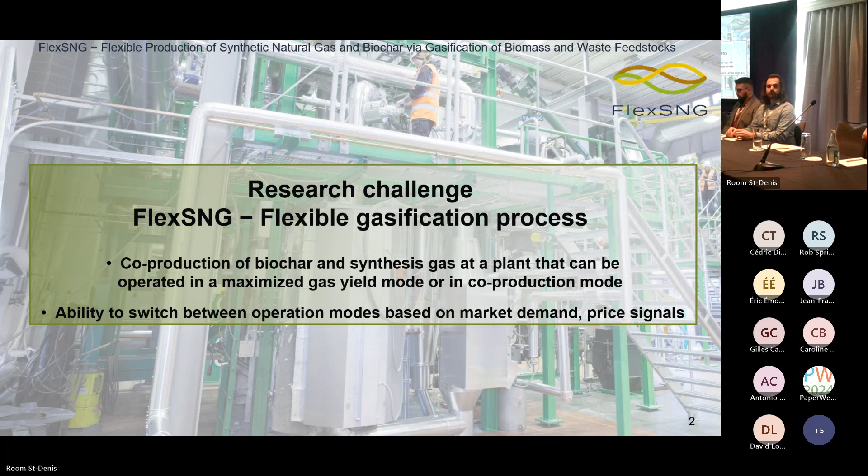Good morning, everyone. I will talk about VTT's research challenge, and our focus here is the flexible gasification process, where we co-produce biochar and synthesis gas in a plant that can be operated in two modes: a maximized gas yield mode and a co-production mode. The plant also has the ability to switch between these operation modes based on market demands and price signals. First, some background for this flexible gasification process. VTT has a very wide gasification-based synfuels process development, and we have key steps here.

Gasification in CFB gasifier, which is pressurized steam oxygen, followed by filtration, hot filtration, and catalytic reforming. The final gas can be utilized in, for example, FT products, methanol, SNG, and hydrogen. So several applications.

We have developed and demonstrated this together with Sumitomo SFW, this process, and also have wide experience with different kinds of fluidized bed gasifiers like CFB, BFB, and modified BCFB, which I will come later to tell you what that is. Okay, that was the background.

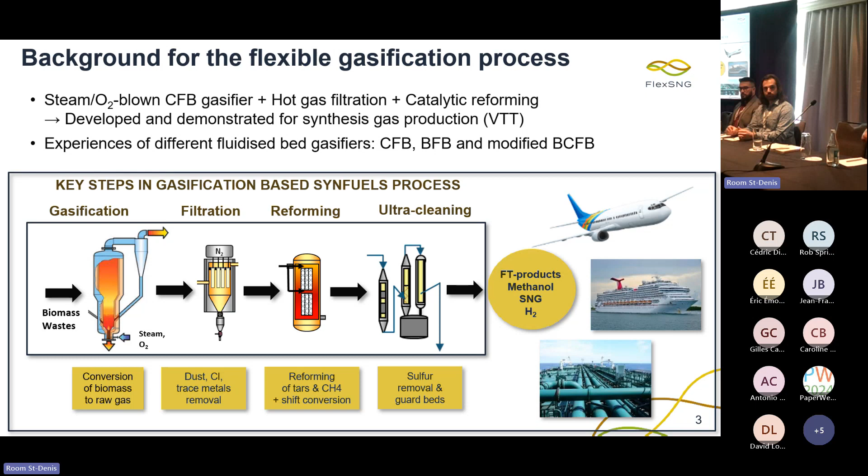Then we enter our fluidized bed gasification technologies. In this FlexSNG project, we had two alternative gasifier designs, which we examined in the co-production of biochar and syngas.

First, when this FlexSNG process was planned, our initial assumption was that the ordinary CFB gasifier process would not be suitable for this biochar production.

In this CFB, the feedstock is fed above the dense bed. Here's the bed, and then it's pyrolyzed in the upper part, and we reach a high carbon conversion. The recycling charcoal meets again the oxygen at the bottom of the bed.

So there would not be produced biochar in this CFB. We also assumed that we would reach a high tar content at low temperature gasification, which would block the filter and cause soot formation in the reformer. So the biochar would be recovered in the CFB gasifier as filter dust.

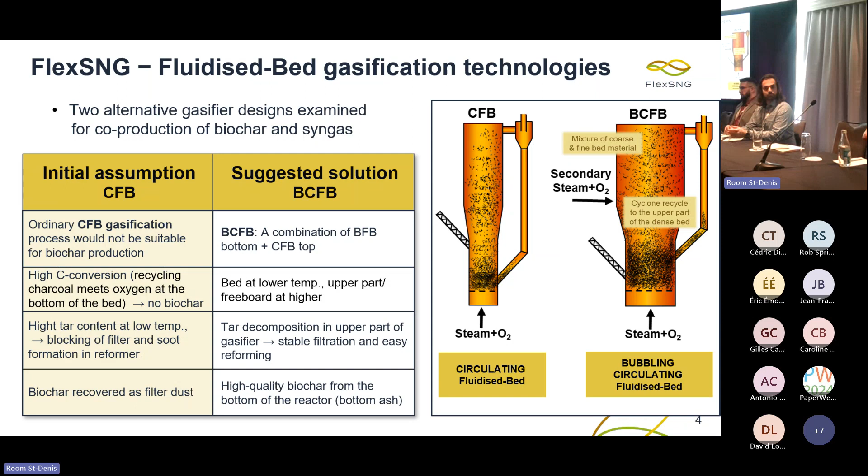Then we produced the biochar, and it was delivered for further characterization to one of our project partners, EIFER in Germany, to see how it was.

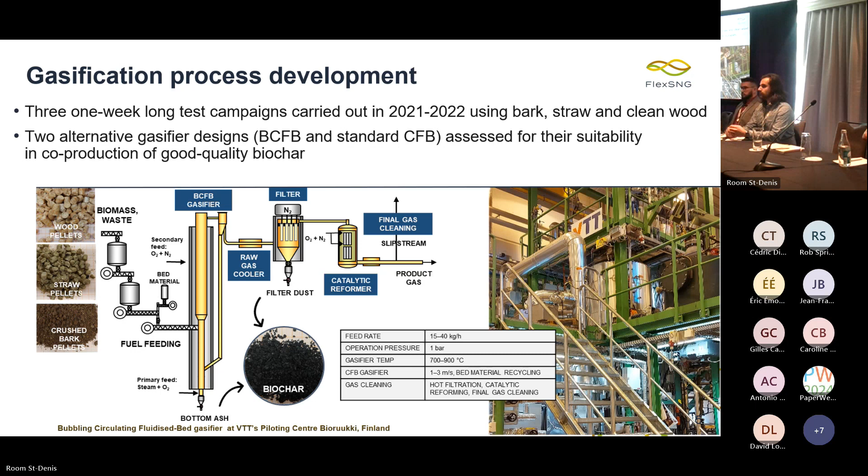First we entered the BCFB mode. We achieved very flexible operation in that case. First we used very high temperature gasification near 900, and as you can see, we reached a high carbon conversion in this case.

Then we reduced the temperature to near 700, and the carbon conversion was reduced in this case. Most of the charcoal was attrited to fine dust, and it would be captured as filter dust in this case.

But then the last set point was done at a lower temperature near 650, and it was the case that we managed to get a biochar like this one, but it also entered the filter dust, the gray bar here. The operation was unstable in this low temperature gasification.

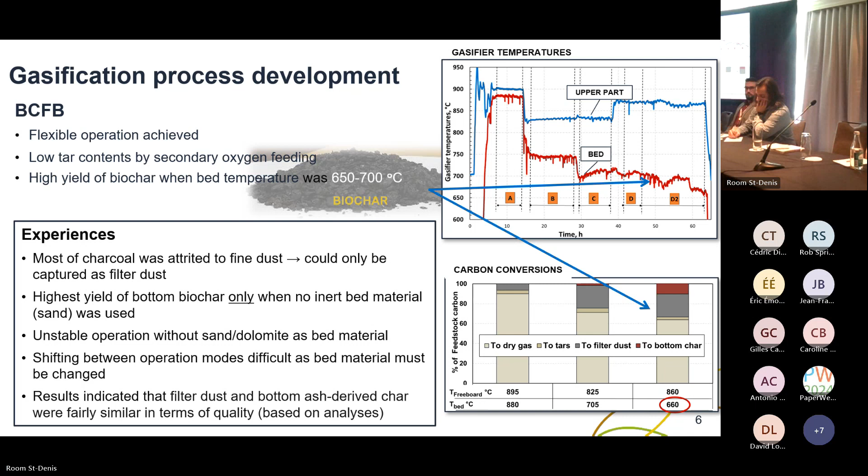Then we entered CFB mode. So we reached again flexible operation under both operation modes, as you can see.

The biochar yields were increased when the gasification temperature was reduced. In this case, the biochar was recovered as filter ash rather than from the gasifier bottom. So it was in filter ash.

But in this case, CFB mode, it was very easy to shift between operation modes, and it's a highly reliable and stable process. We carried out very successful tests with all these feedstocks.

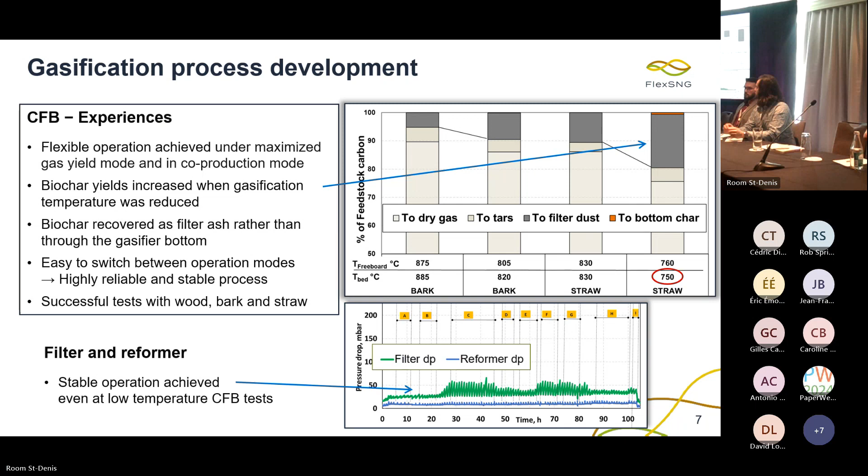Also, the filter and reformer worked well. There was stable operation achieved, and the catalyst worked well. There were Johnson Matthey catalysts, even at low temperature tests.

So the conclusion was that both gasifier modes could be adapted to FlexSNG, but if we take into account the industrial perspective and scalability of this technology, the conclusion is that the standard CFB gasifier was more capable of producing high-quality biochar. It was less complex in reactor design, and would work well. So we selected the CFB for further validation tests, which are now ongoing.

In addition, this CFB gasifier has the following benefits: it's industrially proven by the Sumitomo SFW gasifier design, and it has been demonstrated in syngas applications. Also, the operation flexibility is better in this case, and it's easy to transition between this co-production and maximized production modes.

And also the differences in biochar quality between these CFB and BCFB designs were not as significant as we expected beforehand, although we got a high yield in BCFB mode biochar also. And then the filter and reformer handled even high tar loads without signs of soot formation.

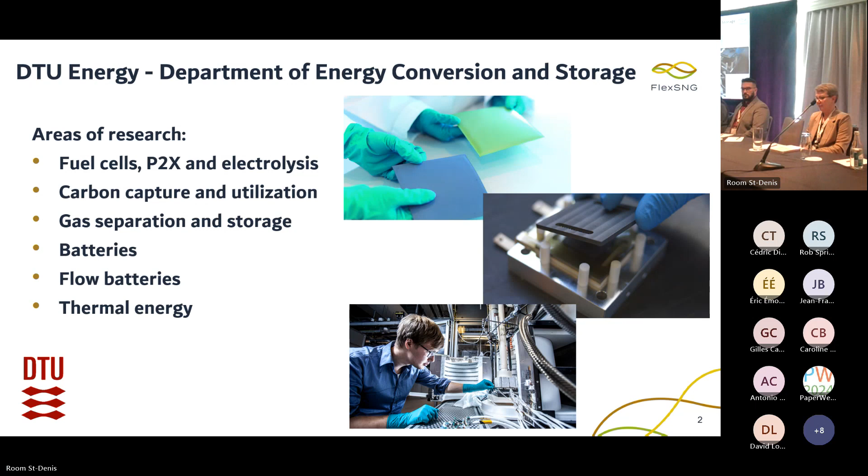And in particular, in this project, we try to apply the OTM, oxygen transport membrane technology, for oxygen production. These membranes are ceramic high temperature membranes that are capable of transporting oxygen from one side to another of the solid membrane by an electrochemical principle of operation. So we can obtain pure oxygen on the permeate side of the membrane. And the driving force is the different partial pressure of oxygen on the two sides of the membrane.

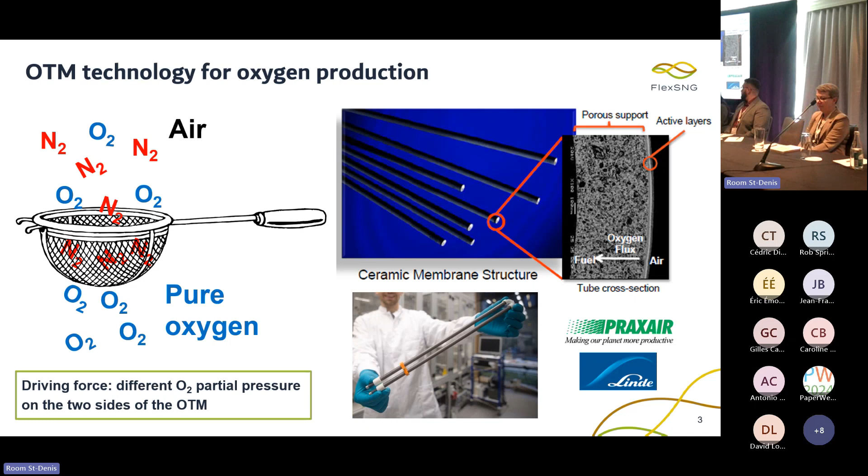And as you can see, the membranes are obtained in this hairpin, as we call it, kind of shape. And they are produced by Praxair, which is now part of the Linde Group. We started testing the membranes in our single tube performance evaluation rig, so small samples of about 5 centimeters of length.

And we characterized the operation of these tubes, flowing air on the outside of the membranes and reducing gas on the inside. And we tried both with pure hydrogen and a composition that simulates the syngas that is produced by the gasifier. And after mapping the performance of the membranes, we managed to obtain the target of the project, which is an oxygen flow of about 3 milliliters per minute per square centimeter of active area of the membrane at a temperature of 950 degrees Celsius. And we got results above the target of the project in both feeding conditions of hydrogen and the simulated syngas.

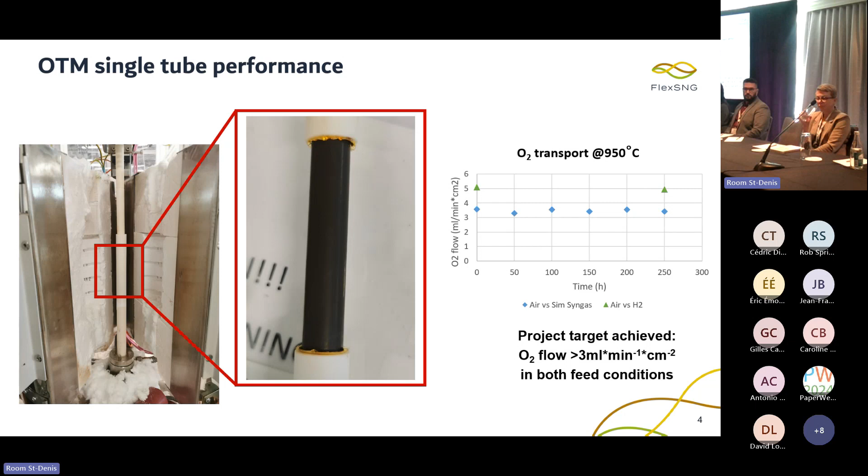After that, it was time to go bigger and implement the membranes in a full-sized reactor. So we designed the reactor in this radial configuration of the tubes that you can see in the cut view of the reactor. We produced it, and as you can see, the operating parameters are a temperature of about 900 to 1000 degrees that grows from inlet to outlet, and it generates a heat power of about 1.1 kilowatts.

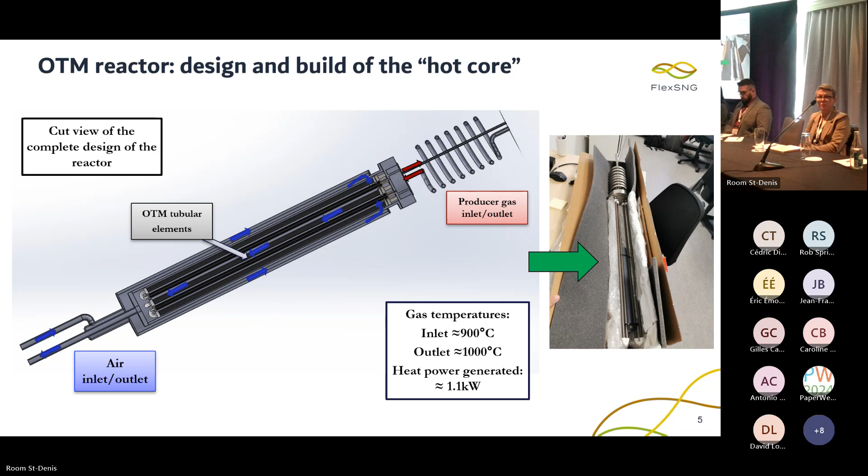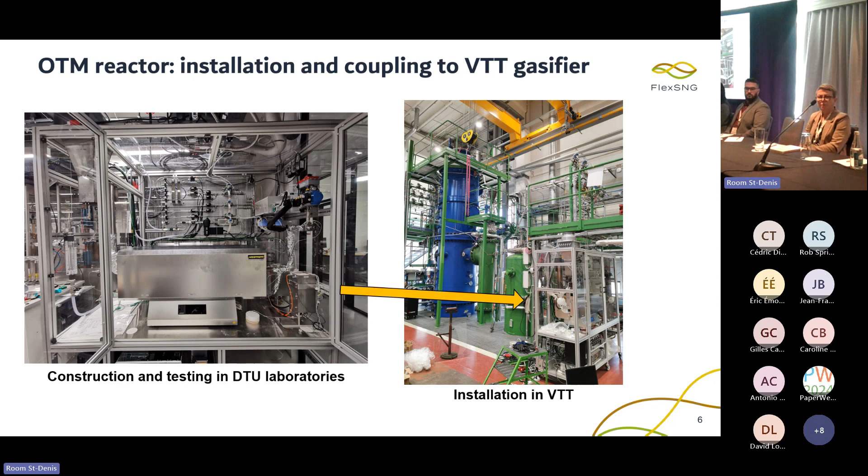The reactor was then installed in a test rig that can be operated autonomously, but can of course be interfaced with the gasifier. And then the rig was shipped to Finland and interfaced with the gasifier, so it can receive the gas directly from the gasifier during operation. And the results that we obtained were very good.

We are still testing. We are 2 test campaigns in, and we managed to obtain stable operation of these membranes for above 100 hours, and a performance in terms of oxygen transport that is within plus minus 5% of the reference levels that we measured in laboratory conditions.

A very good result that we obtained is that the membranes are highly tolerant to the impurities that are contained in the gas, so sulfur, chlorine, that we foresaw could be a problem for the membranes, but for now it seems like they are quite stable and tolerant to this level of impurities. And they managed to achieve a conversion of tar above an average of 90%.

We also checked the resistance of the membranes to cycles of oxidizing and reducing conditions, and they also managed to withstand this cycling without particular signs of degradation of performance.

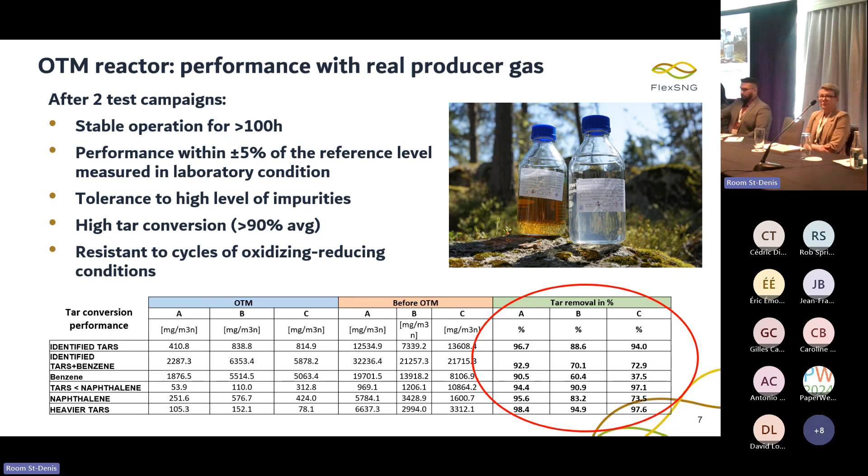So the integration was a bit challenging, but we also have future challenges. We have to test the long-term durability of the OTM. So in terms of thousands of hours, that will go above the project target, but we plan to continue testing them.

And we plan on trying to improve the conversion of aromatic molecules such as benzene and naphthalene by introducing a different catalyst or varying the residence time of the gas inside the reactor. And on top of that, we're probably also going to test pressurized operation of the reactor, because now we operate just slightly above ambient pressure.

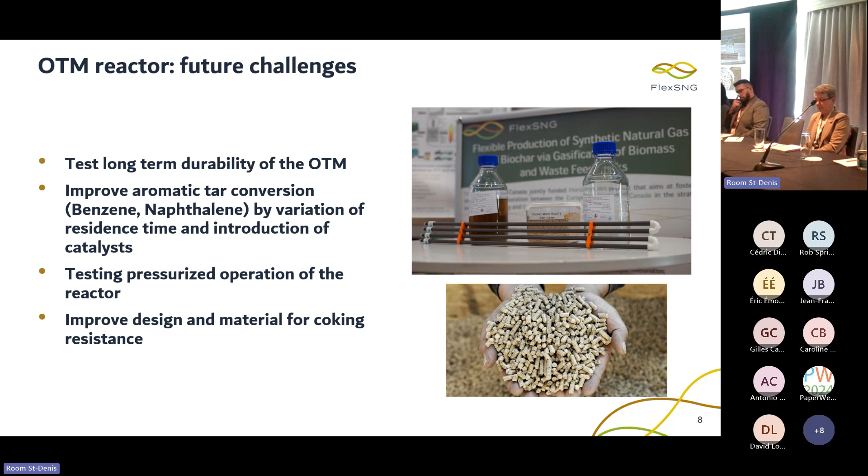And also check some alternatives for the materials utilized in this reactor design to improve the coking resistance of the various parts of the balance of plant. And that's all from me.

Okay, so my time. When I'm developing our decision support systems, I typically look at one chain at a time, so forest by itself or agricultural by itself. Now, of course, in FlexSNG, we have this idea to put everything together, which makes it more complicated. The potential for savings is higher, but it also brings some complications. So I'm briefly going to go through some of the challenges that you typically don't see when you are doing one of them.

So one of the critical ones is the seasonality. In agriculture, depending on the crop type, you might do 1, 2, or maybe 3 harvests during the year when there's a high intensity of harvesting. In forestry, it's more long term. You do a bit more harvesting in the winter, but the collection of residues more in the summer. So you have a bit of seasonality. For municipal waste it's similar. You have more demolition, more renovating of houses in the summer, so you have more supply at that time.

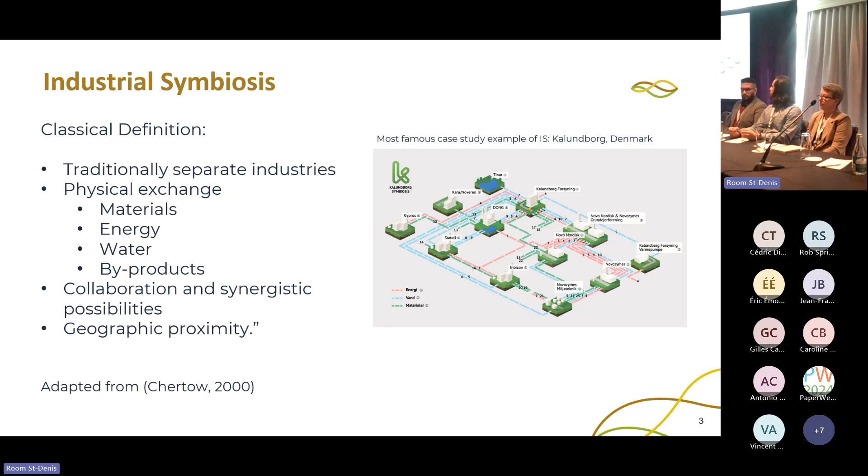So if we now take these four classical, there we go. If we apply this definition of industrial symbiosis to a biorefinery, then it can potentially facilitate the increase of profitability as well as competitiveness. And it does so by doing exactly as the definition states. It looks at the exchange of waste, energy, cost reduction, as well as the environmental impacts, and improving the opportunities for innovation as well as collaboration.

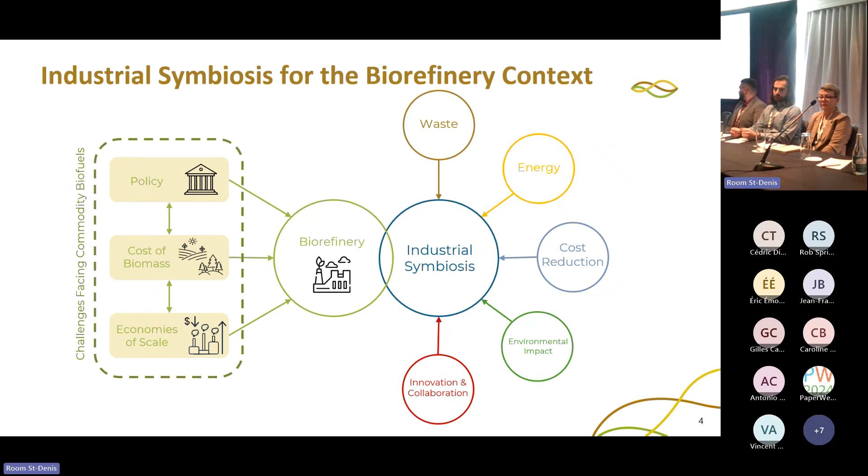So what are the challenges that we'll be facing? I think everyone this morning has highlighted the challenges that we will be facing with FlexSNG moving forward very clearly, and also highlighted the potential solutions and the collaboration that we need. One major thing is resource availability as well as supply chain challenges, where biorefineries rely heavily on a consistent supply of biomass feedstock.

The variability in availability, quality, as well as the cost of biomass can pose significant challenges. Additionally, logistic issues related to collection, storage, and transportation of biomass can impact operations and efficiencies as well as cost. So the potential solution for this is integrating biorefineries with a network of industries, where we can have access to biomass sources in a variety of sectors such as agriculture, municipal waste, as well as forestry.

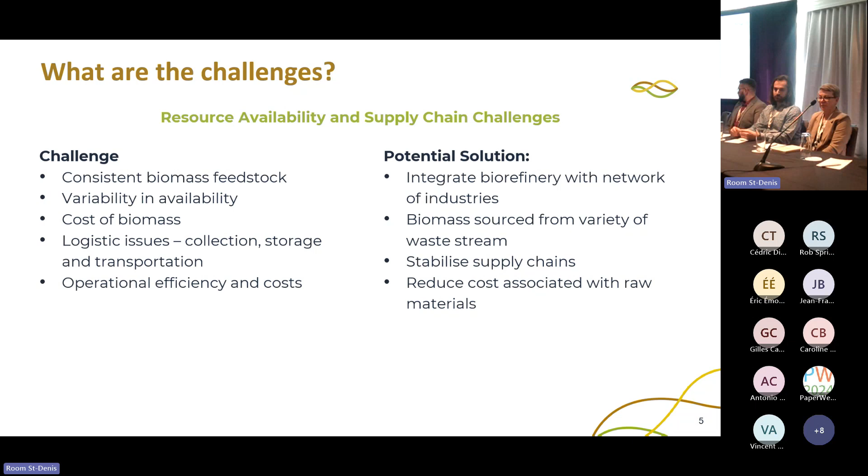This can then stabilize the supply chain and reduce costs associated with raw material. For instance, industries that produce organic waste can directly supply a nearby biorefinery, minimizing transport costs and enhancing feedstock security. Another issue that has also been highlighted is policy and regulatory barriers.

And David actually mentioned so beautifully this morning that in 2024, we're more equipped than we were 10 years ago to move into this sector, where the challenge is generally that there's uncertainty and unfavorable policies and regulatory environments that can hinder the growth of biorefineries, industries lack the incentive for sustainable practices, and there are stringent regulations that might not account for the benefits that you can get with adding

a biorefinery. So to swing this, we can say that by demonstrating the environmental and economic benefits of the integrated approach, industrial symbiosis can influence policy development, but it's also collective advocacy from industries involved in symbiosis that can lead to more supportive policies, incentives for waste reduction, energy efficiency, and development of bio-based products.

Next up is the challenges that we face with technological and operational hurdles. Developing and optimizing technology for biomass conversion is complex, costly, and requires extensive R&D to satisfy the bankability requirements of investors and financiers. Process and operational efficiency is also affected by feedstock variability, as we've heard so clearly.

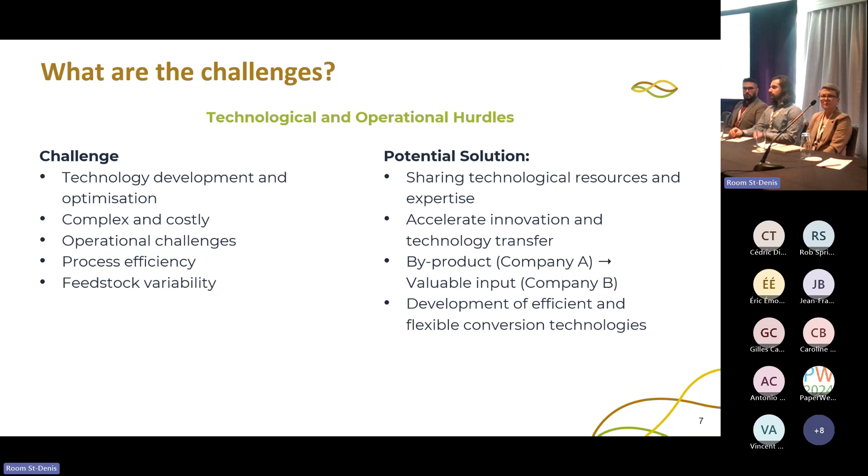So this brings us to my final point, which I'd like to highlight as well, the economic and financial risk. High initial capex investment and uncertain financial returns can deter development of biorefineries. The market for bio-based products is also evolving, and there can be significant price volatilities for both feedstock and end products.

However, yet again, as beautifully highlighted this morning, we're moving into an era where the larger industries, such as aviation and maritime, are feeling the pressure to move towards more bio-based fuel sources. So this is definitely also helping with developing that market for financiers to go, okay, we'll come to the table. So the solution for this is definitely collaboration facilitated by industrial symbiosis, and this can help spread that economic risk and provide more stable financial models.

So as said, joint ventures and partnerships all allow for the sharing of cost and the development of technology, as well as feedstock supply and product marketing. Moreover, this creates a diversified portfolio of end products that can mitigate the market risk that we can have.

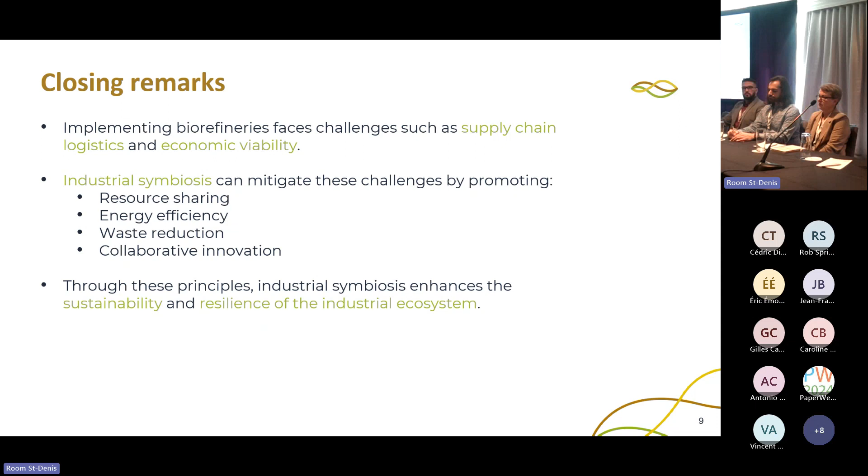So just as a closing remark, implementing biorefineries faces challenges such as supply chain, logistics, and economic viability, while using industrial symbiosis can mitigate these challenges by promoting resource sharing, energy efficiency, waste reduction, and collaborative innovation. Through these principles, industrial symbiosis enhances the sustainability and resilience of the industrial ecosystem.

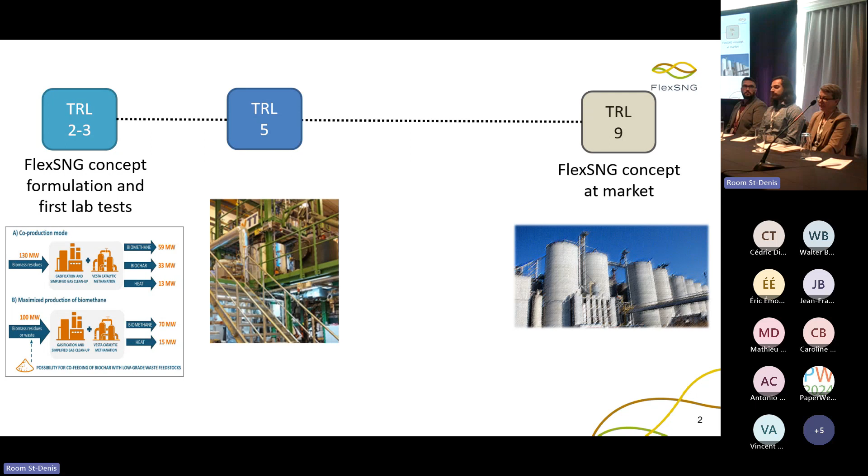Now the question we have to answer is how we're moving forward. How can these very interesting technologies, which already have a beneficial impact on the production of sustainable biomethane and biochar, be moved forward and become economically available and appealing in the near future?

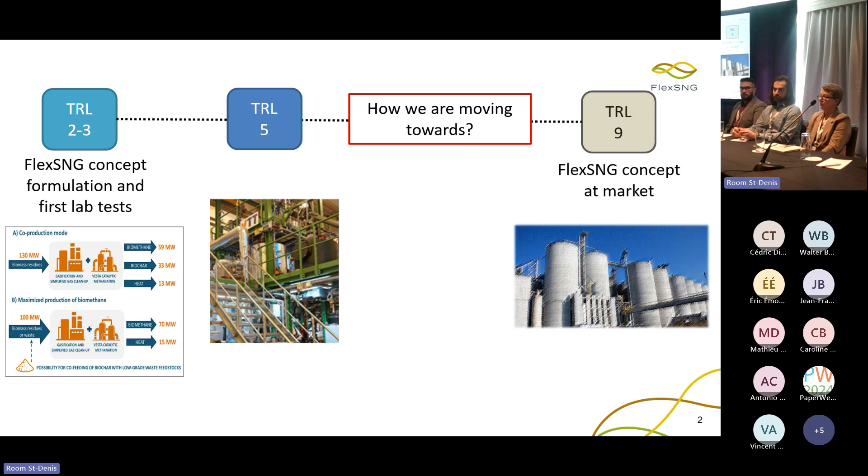This is the role of process modeling, to contribute to that. First of all, what we are doing is using all the information given from the lab and pilot activities that have been carried out, from the gasification tests, from the reforming activities, for the membrane as well, and of course the supply chain and the methanation processes.

This information is valid and important in order to set up and establish a process modeling that can replicate what has been done at pilot level. Then the process modeling answers the following questions: first, under which scheme can all these technologies be put together and integrated in an efficient way in order to reach efficient operation at full scale.

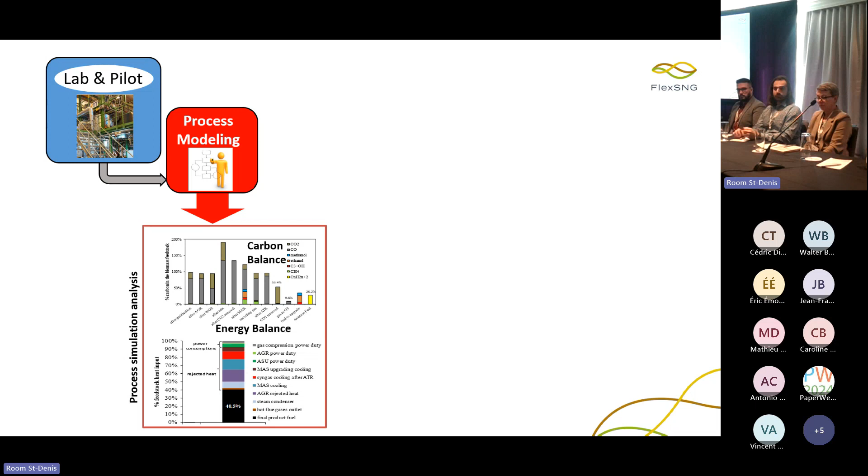Of course, we are also going to perform the heat and mass balances. This is very important in order to identify the performance of the overall plant. This information is very important to proceed to the next step of the overall impact assessment of the FlexSNG technology.

The first step is to develop an appealing and efficient cost estimation analysis, and to perform the techno-economic assessment of the concept. Under the framework of the FlexSNG project, we have already established 8 interesting case studies from Europe and Canada, and we are going to see how the FlexSNG concept fits different ways in terms of feedstock valorization, scale, and end products exploitation.

The second step, in parallel, is to identify the environmental impact and the benefits gained from these new technologies, by performing LCAs on these case studies.

All this information will then be fed back to the technology providers, to identify the challenges, problems, and obstacles that need to be overcome in order to move to the next step, which is the formulation of a demonstration plan, and hopefully reach industrial realization of the FlexSNG concept in a few years. Since I don't have results to present yet, please stay tuned - in the following months we're going to present and show the outcomes of these results and analysis. Thanks.